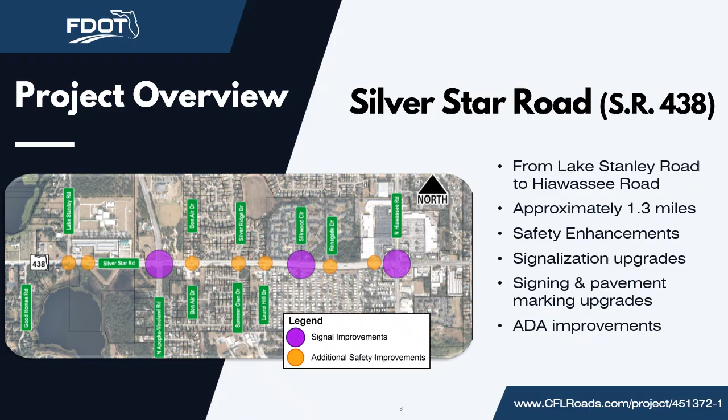of 2021. In the past 5 years, Silver Star Road has experienced a high number of vehicular, pedestrian, and bicycle crashes along the corridor. In an effort to reduce the chances for serious injuries and fatalities, this project includes upgrades to signalization at 3 intersections, improvements to signing and pavement marking, and Americans with Disabilities Act, or ADA, improvements at 6 intersections and 2 commercial driveways along the corridor.

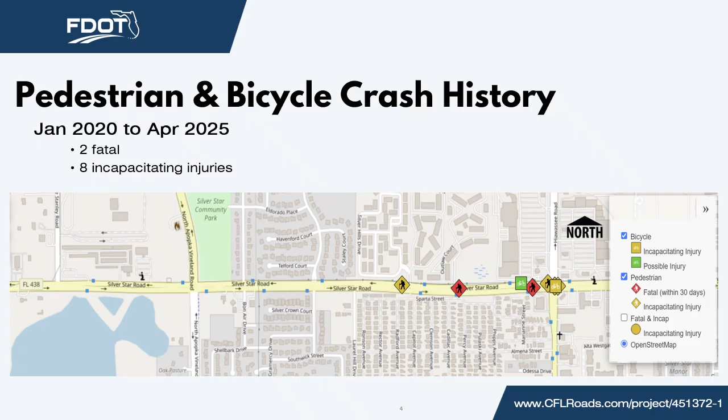The most recent crash data from January of 2020 to April of 2025 found a high level of fatal and incapacitating injury crashes along this corridor, indicating a need for additional safety improvements for pedestrians and drivers. This map shows the locations of those crashes involving pedestrians and bicyclists within the project limits. The map legend on the right indicates the type of crash, with red indicating fatal crashes and yellow indicating incapacitating injury crashes. The data shows 2 fatal and 8 incapacitating injury crashes involving pedestrians and bicyclists.

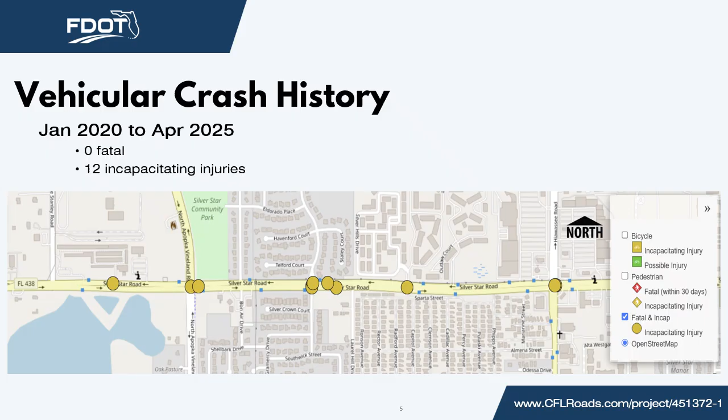Looking at the same area, this map shows the locations of crashes involving vehicles. The map legend on the right indicates the type of crash, with red indicating fatal crashes and yellow indicating incapacitating injury crashes. The data shows no fatal crashes and 12 incapacitating injury crashes involving vehicles. We will now review the proposed project safety improvements.

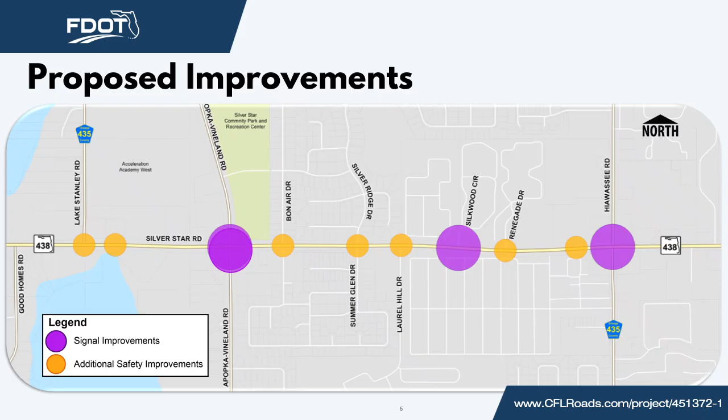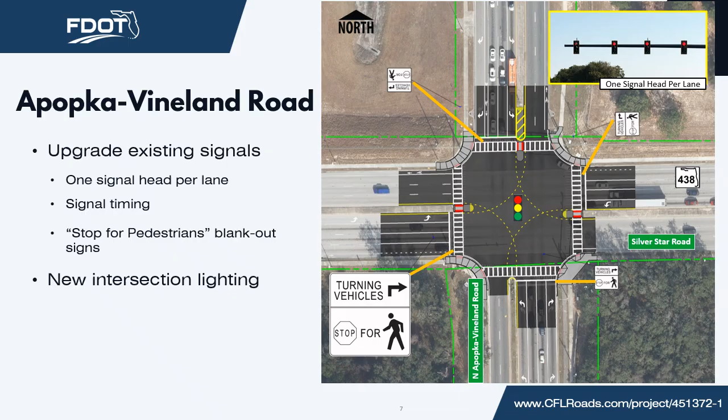Signal timing will include a 4-section flashing yellow signal that allows for eastbound and westbound left turns. Stop for pedestrians blank-out signs will be included at each right turn lane. These signs indicate turning vehicles must stop for pedestrians in the crosswalk. The project will also install equipment at the intersection to monitor traffic conditions and help with emergency response. This intersection will also receive new intersection lighting.

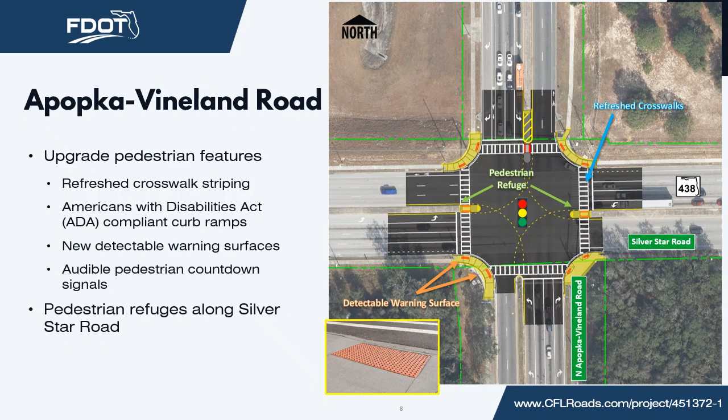This intersection will also receive upgraded pedestrian features including refreshed crosswalk striping, Americans with Disabilities Act, or ADA, compliant curb ramps, new detectable warning surfaces as shown on the inset picture and noted in red at the start of each crosswalk, and audible pedestrian countdown signals. The crosswalks located on Silver Star Road will include pedestrian refuges at the midpoint of each crossing.

At Silkwood Circle, the project will signalize the restricted crossing with pedestrian-activated push buttons at both ends of the crosswalk and in the median. The reconstructed bidirectional median will provide a pedestrian refuge, new crosswalk striping, and lighting upgrades. The signal will remain green unless activated by the pedestrian push buttons. The allowable left turn and U-turn movements at this intersection will not change from the existing. However, the median will be reconfigured to accommodate pedestrians and better prevent left turns from Silkwood Circle to Silver Star Road.

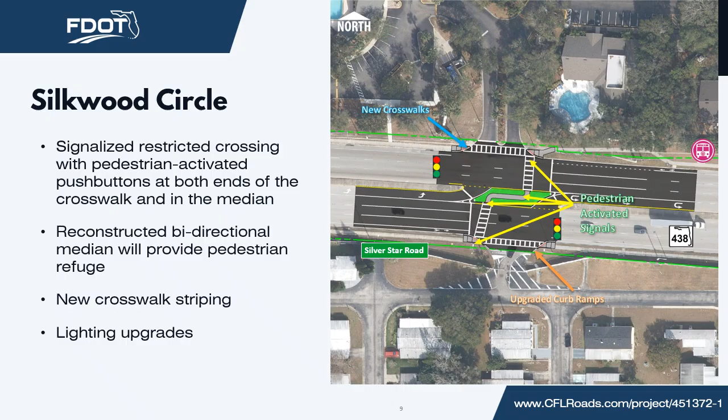At Hiawassee Road, the existing box span signal will be replaced with new mast arm signals with upgrades including one signal head per travel lane, stop for pedestrians blank-out signs, and traffic monitoring equipment to enhance driver, pedestrian, and bicyclist safety. New intersection lighting adds to upgraded pedestrian features, such as refreshed crosswalk striping, ADA-compliant curb ramps, and audible pedestrian countdown signals.

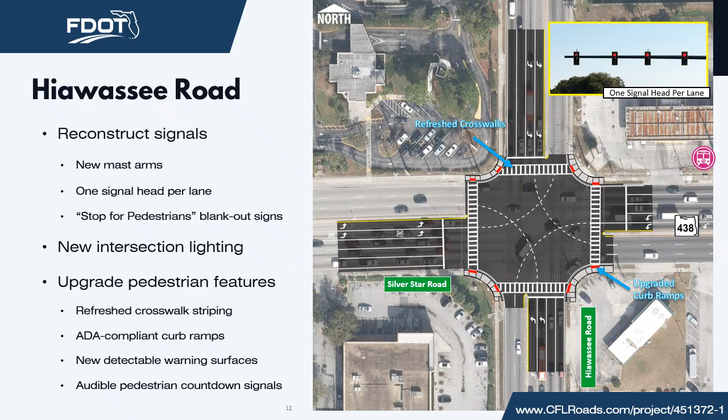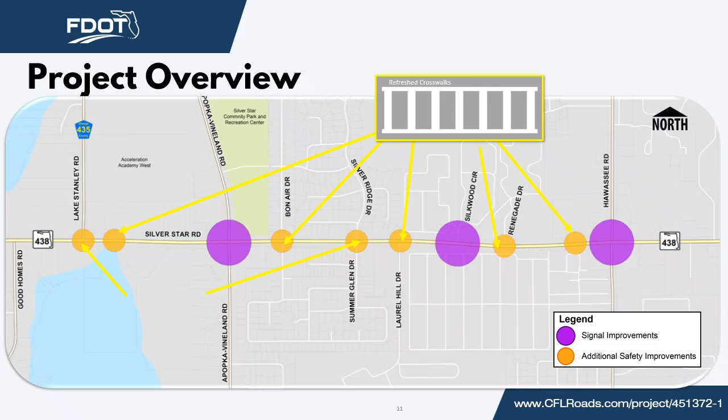This project will require lane closures during installation of new signal mast arms at Hiawassee Road and during milling and resurfacing operations. At least one lane of travel will remain open at all times. Daytime and nighttime work is possible. Access will be maintained to properties throughout construction, and while lane closures are in effect, temporary bus stops will be provided by Lynx. Additionally, pedestrian and bicycle detours will be needed to complete concrete work at the intersections.

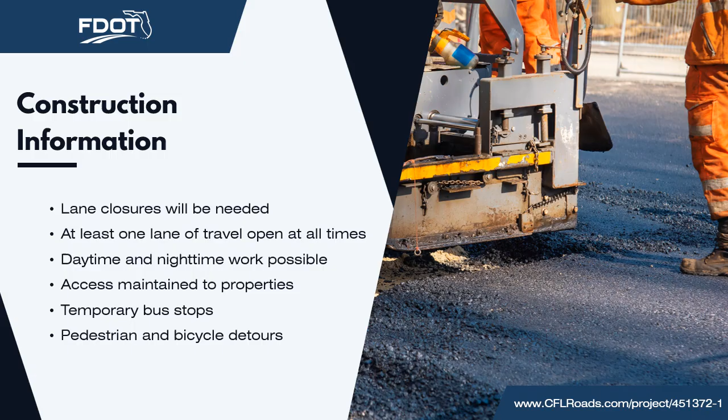Design is scheduled for completion in summer of 2026 with an estimated cost of $1 million. No additional right-of-way is needed for this project. Construction is scheduled to begin in fall of 2026 with an estimated cost of $3.6 million.